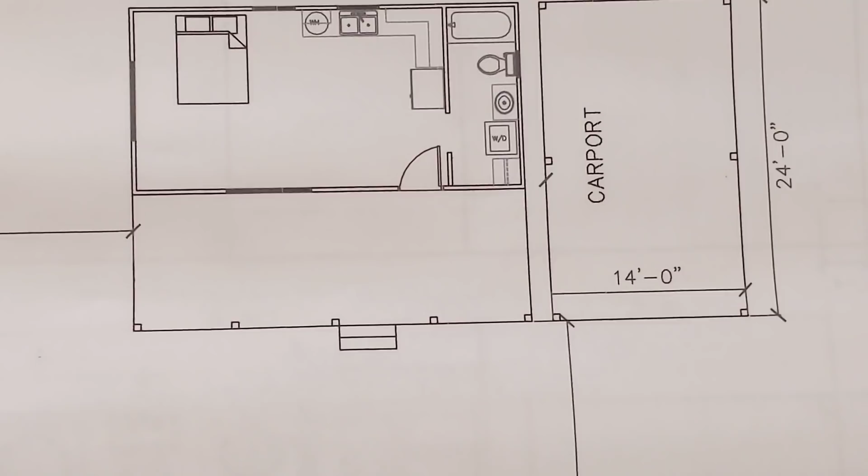This is Rusty 78609, and what you're looking at is a plan for my cabin slash tiny home. For those who haven't seen the cabin, go to my playlist titled Building a Tiny Home, and somewhere in that list you'll see a video showing the cabin I'm planning on building.

The dimensions of this cabin are 14 feet this way, 14 feet, and then an 8 or 10 foot patio there, that's included. So it's 14 by 28 right in here, which is 392 square feet. This is going to be an Eagle carport, just an aluminum carport, and it'll be 14 by 24 or 26 in that range. These right here are windows all around like that. There's a window over the kitchen sink, one in the bathroom there.

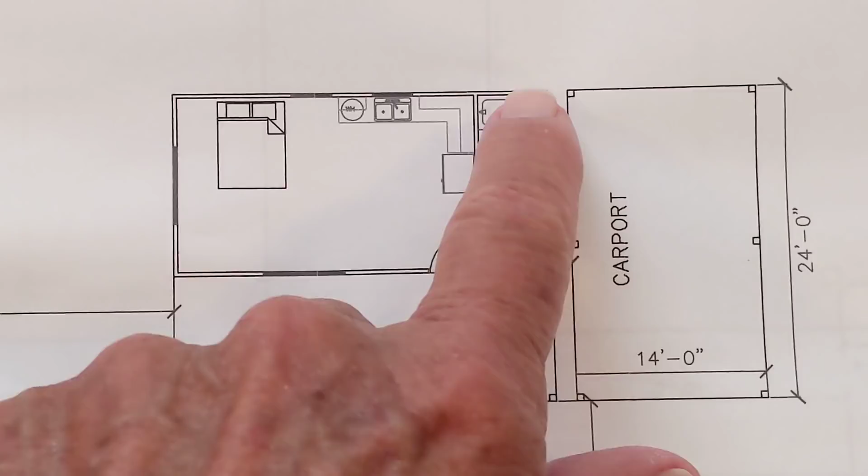And we've made a few changes in the bathroom area. When I talked to Shelton, the owner of Cabin Masters in Fredericksburg, Texas, if you want to check them out, you can check them out at cabinmasters.com.

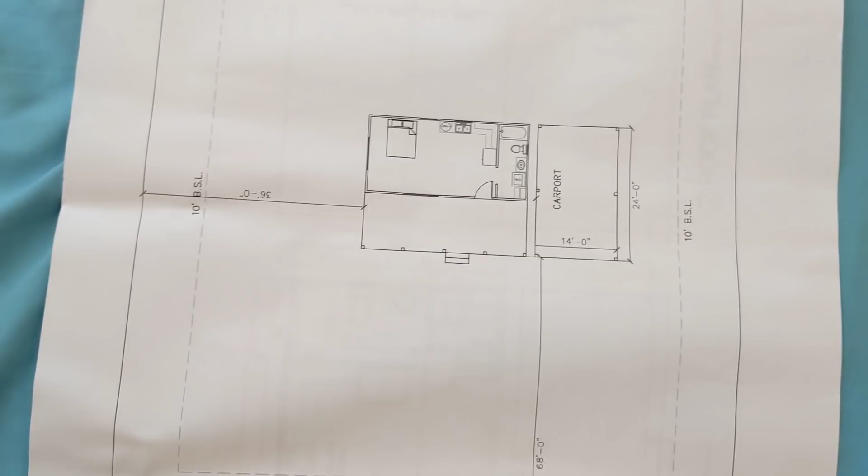But having said that, this is the basic plan, and this is on the lot. This is the street, East Terrence Street, and it shows the dimensions, and the scale is 1 inch equals 10 feet. I'll zoom a little bit and let you take a look at the floor plan a little closer. It's hard to hold the camera steady. The more you zoom, the more it magnifies the shakiness, if you have any.

But you'll see that this is a bed here. That's a hot water heater. That's a 2-bowl sink, actually I'm just going to have 1 there. And then this would be the refrigerator. Come around here, that's open shelving. That's the shower, that's a toilet, sink. I think that's a washer dryer. And then this over here is going to be a little closet.

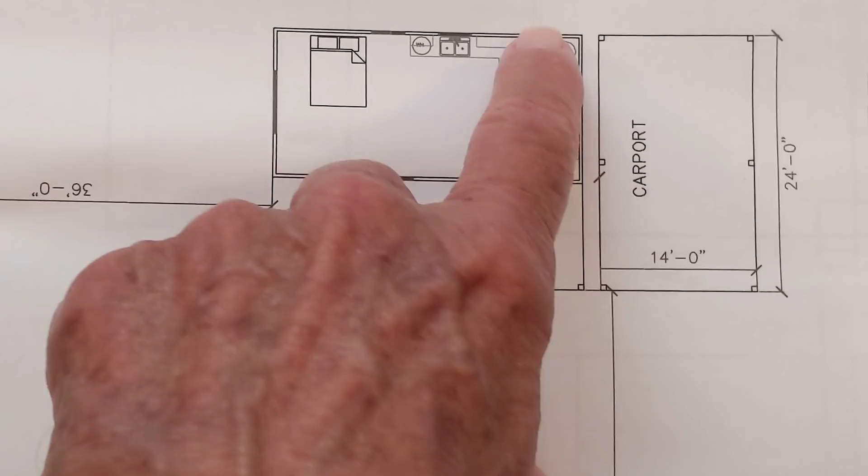But I've changed this up a little bit. We're going to move this wall about a foot this way and give me a little more space in there to do a closet and hanging clothes and all that stuff. Because people are saying, well, there's no storage. There is no storage. I don't want any storage. I don't need any storage.

I live in a 17-foot Casita travel trailer right now, and believe me, everything I've got will fit in there very nicely, okay? No problem, because I've downsized to nothing almost. Again, I'm 75 years old, so things are not really important to me.

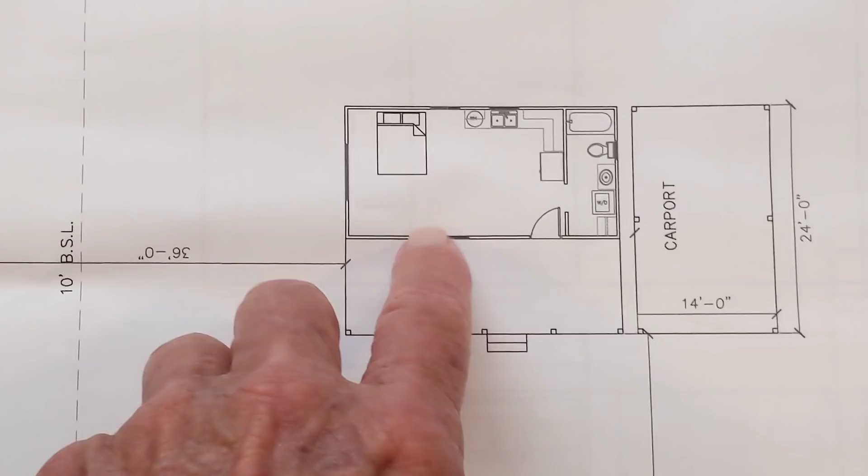But anyway, this is the basic plan here. Again, these right here, these windows are what they call 3050s, there's 2 of them together. So you've got plenty of window there, and then a window over the sink. 3050 means like 3 feet by 5 feet.

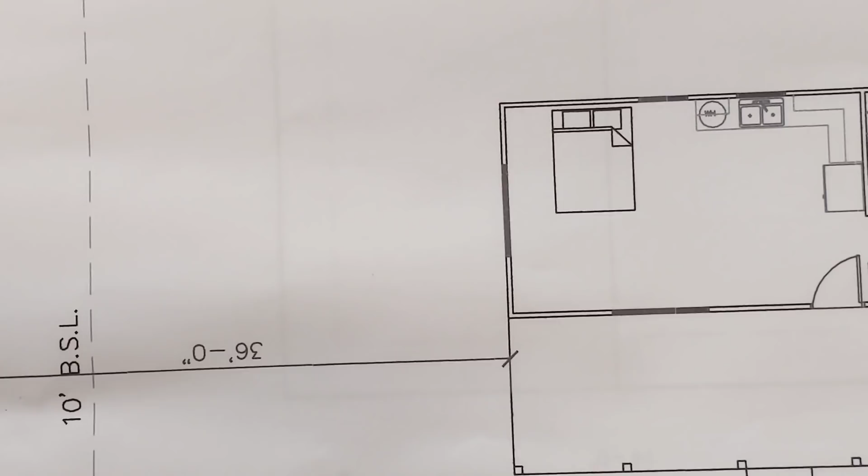Anyway, the guy that drew these plans is named Chad, and his phone number is 830-613-5772, and you can call him if you want to have some plans drawn up.

Or you could actually use the scale here and kind of use this as a guide. Let me get the next one. Now this is a full set of plans that you would give to a builder, even though now Cabin Masters has a plan that you can modify, okay? But I went ahead and did a plan. I took the 14 by 28 foot home and laid it out the way I wanted, to see how what I plan to do is going to fit.

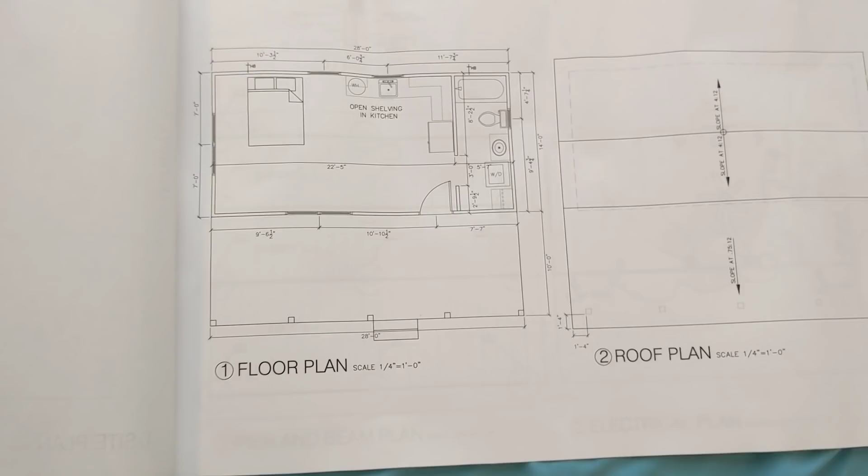It cost me $200 for the plans, which is a hell of a deal, because I've got a full set of plans to give to the city now, since I have to give 2 sets of plans to the city. And then of course I left one with Shelton at Cabin Masters in Fredericksburg with some changes on it.

I'll zoom just a little bit here. And again, let's see what the scale is on it. The scale on this page is 1/4 inch equals 1 foot. And so that shows you exactly how the bed's going to fit in that big open room, and the hot water heater and everything.

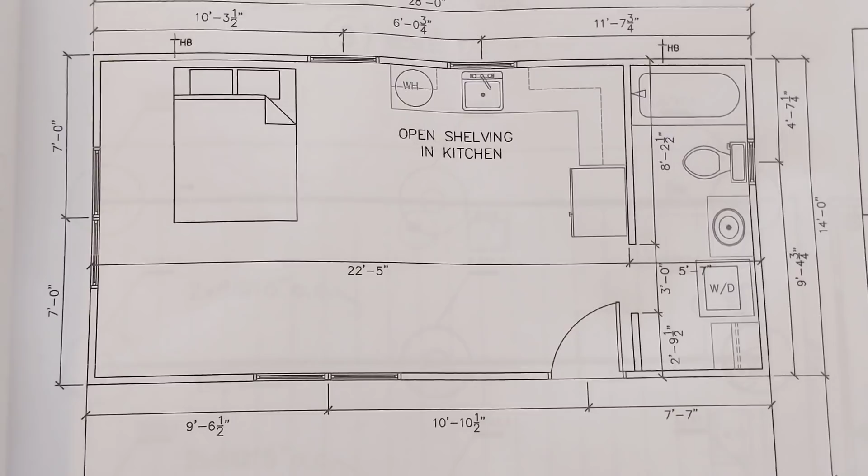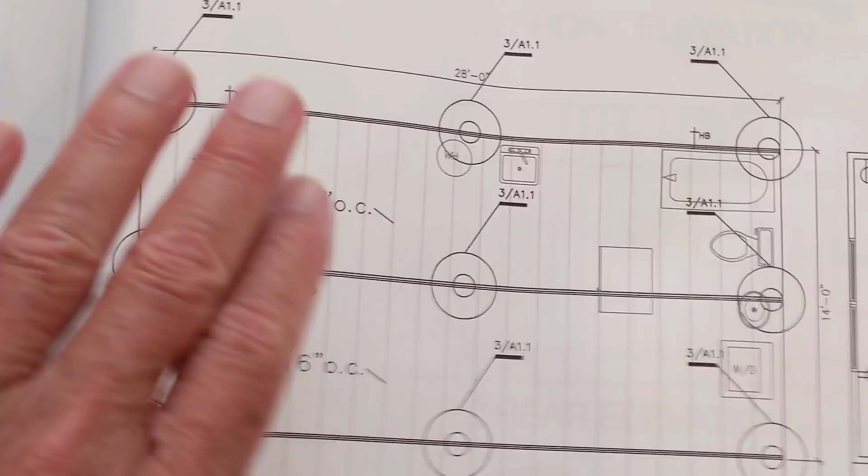And then we go one more page. Let me flip it, I think you end up with 4 pages. Anyway, this is the plan for this. I'm putting it on what's called pier and beam. The foundation type is pier and beam.

You can put them on a slab or whatever you want, but Cabin Masters builds on your lot, on your site. They show it with material and build. You don't even have to clear it if it's fairly level, they'll build right there and you're good to go. But I'm in the city of Llano, so I have to adhere to city ordinances and whatever they are.

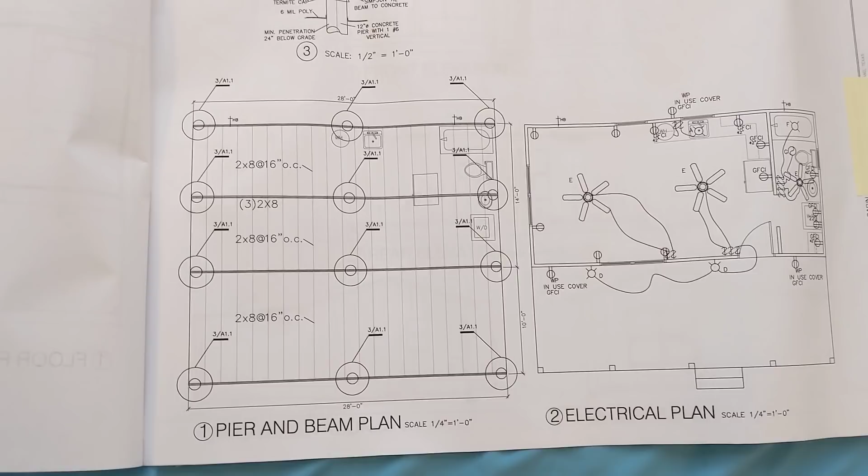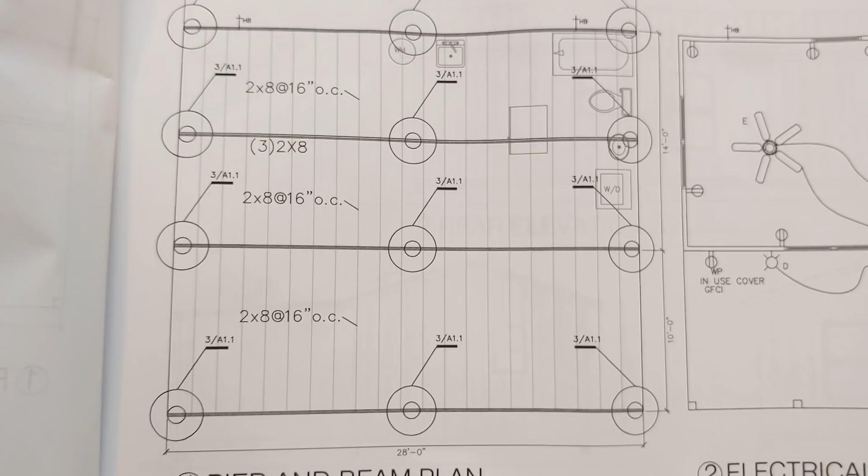But this is a plan for a pier and beam foundation, and this shows the specs for that pier and beam stuff, what's required. It shows the 6 mil poly down here, that's basically some black plastic. And then it shows a termite cap and some different things that are required in the cities. And of course, Cabin Masters will meet all the city requirements, city specs, and that's a pier and beam plan right there.

Next to it is the electrical, and let me move this over a little bit. This is the electrical plan and plumbing on this page, I believe. Yeah, it's got the deal.

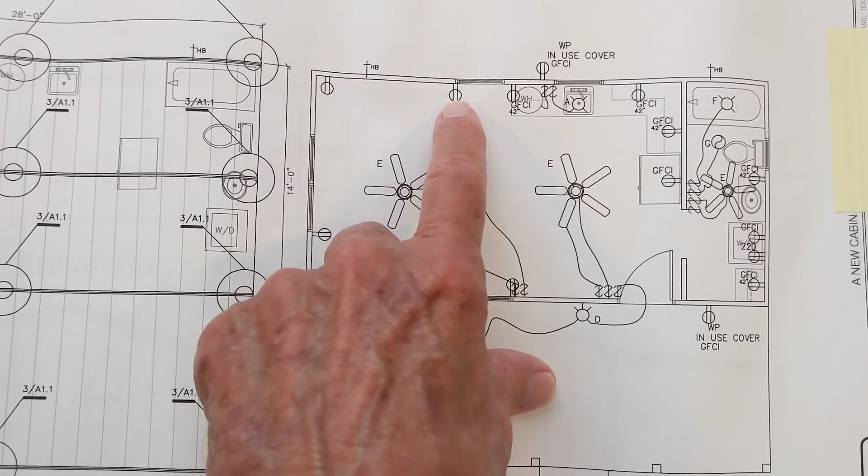Anyway, so you see these little deals like these are outlets, like plug-in outlets, 110 volt, and so you see a bunch of those all along the walls and stuff. These are ceiling fans, shows how they're wired to be turned on and off. These are porch lights or lights out on the patio. And then this right here, these are double outlets on the front porch for, like plugging in, I don't know, a weed eater or whatever, if you wanted to have a little electric barbecue pit or something out there. Anyway, I got a fan in the shower too, and it shows all the electrical outlets.

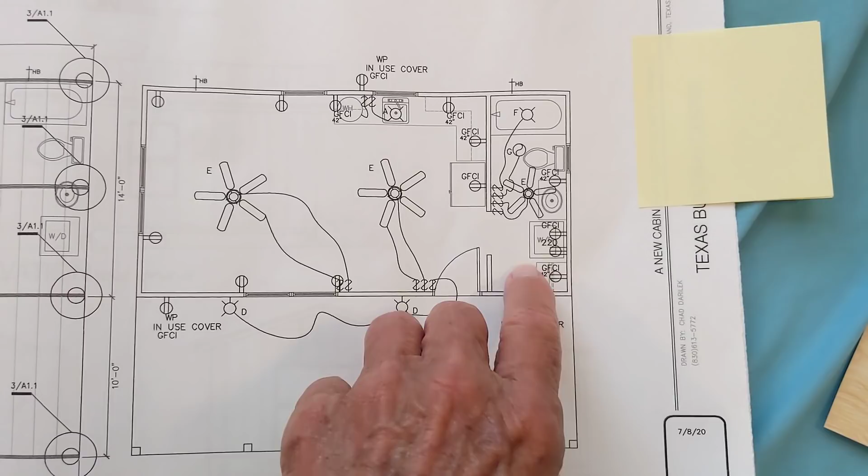And this right over here where it says HB, you may not be able to see that too clearly. HB is hose bib, that's an outside faucet, one on each side, in the rear. I didn't put it in the front because I don't plan on watering grass, nothing, I'm not gonna mow anything. I'm gonna do zero scaping, or I will zero scape it myself. So this is electrical plumbing.

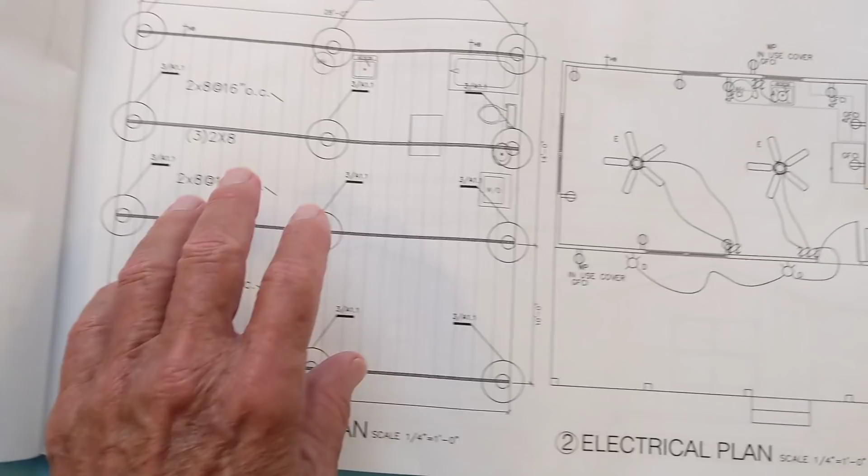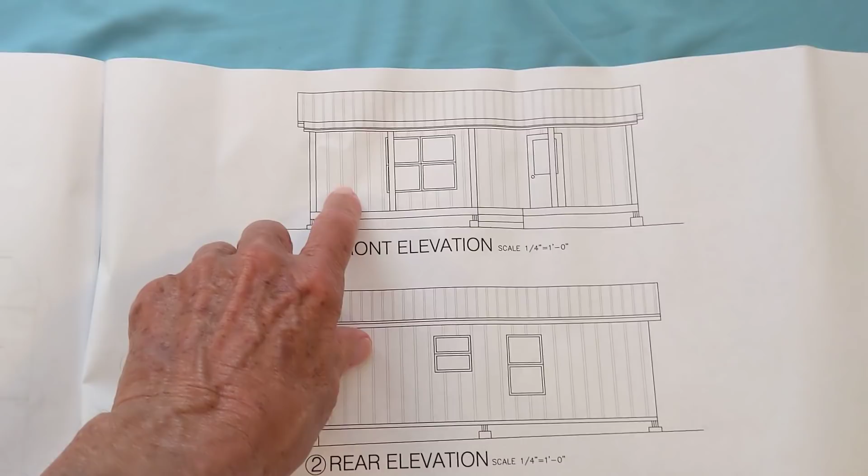This is foundation. And over here, now you're going to see, this is what you call elevations, that's just basically a drawing of the home showing the front view. It's going to have a metal roof, and the siding on this is showing board and batten. But we're actually going to go with cedar lap and gap, the cedar board and batten is running vertically up and down, the lap and gap runs horizontally. Actually, it looks better, okay, so I'm going to do that.

Anyway, this is the front of the house, shows the door, front porch, the steps, and then over here, this is the back of the house, shows the window there. This is the window over the kitchen sink. This is the west side, got one window in the bathroom. Why? Because that's the west side of the house.

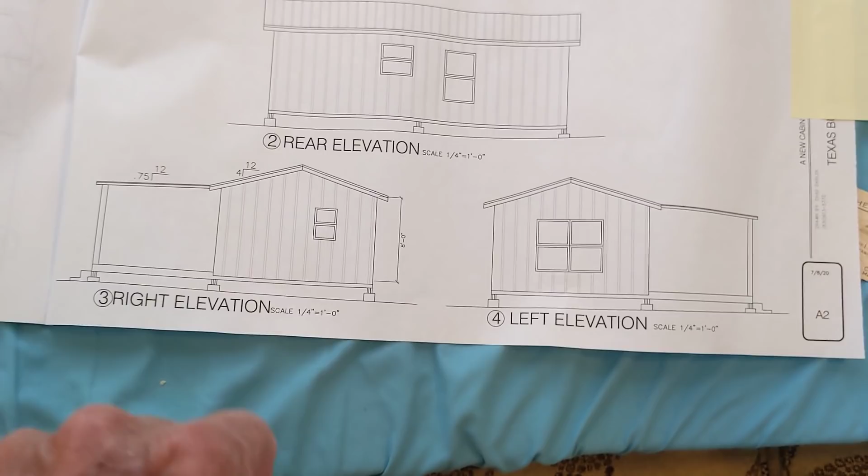Even though I'm going to have a carport out here to help protect it from the direct sun in the summer in Texas, which is very hot, having fewer windows there helps too. And this is the west side here. Actually, this is the east side. Is that right? Can't even remember how my house is done now. Let me think about this. This is the west side over here. I do have windows on the west side. Yeah, because I remember.

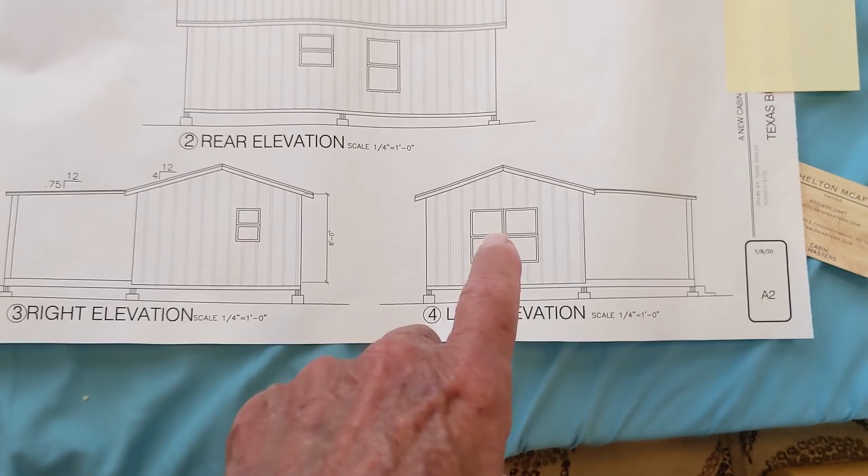Yeah, I added those, and I might take them out. I'm not sure, but we'll see how it goes. I'm going to use a mini split air conditioner. Those are the drawings of the house, the cabin, whatever you want to call it. And that's the last page right there.

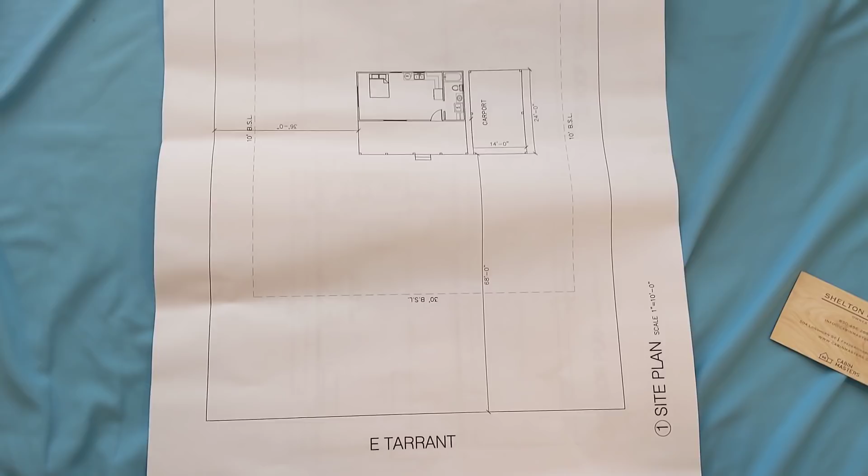So having said that, guys, now you know more about that. But whenever you're going to build a tiny home or a cabin, if you're going to do it yourself, you need a full set of plans. That includes the site plan showing how the house is going to fit on the lot, how far it is from each side, the front and the back. You also need plans showing the electrical layout, where the outlets are going to be. You need a plumbing plan showing where your plumbing is going to be for your washer, dryer, kitchen sink, bathroom sink, and all that. And you also need a plan showing the foundation.

Having said that, guys, that'll get you started. Get you a full set of plans, and then you're good to go. Now, most tiny home builders, cabin builders, have a set of plans, or they actually have a few that they build, just a few different designs.

Now, the downside of buying a tiny home that's pre-built is they have to be able to tow it down the highway. In other words, they have to get it to your site because they build them at their location and take them to your site. So they can't be over, I think, 11 feet wide to go down the highway. This, site-built, this home is 14 feet wide, because it's site built. That makes a big difference. So if you're buying a tiny home that's already made, or you're going to do a site-built home, that's one of the choices you'll need to make if you're going to get into building you a small home.

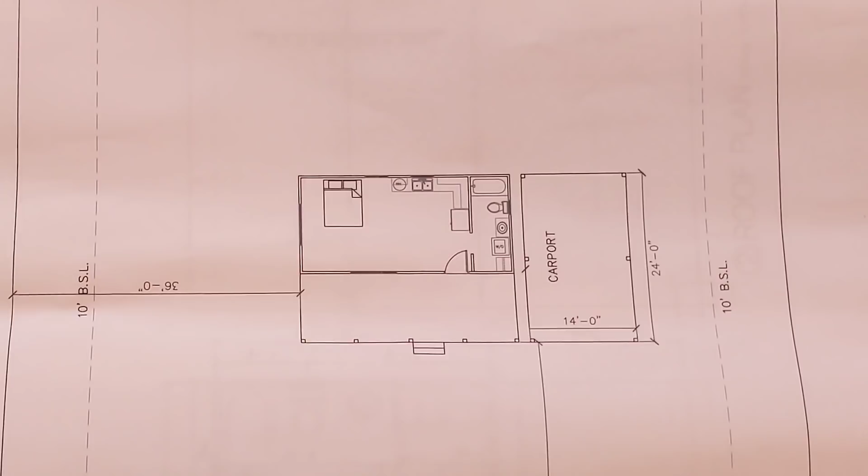But their lead time on building a home right now is about 6 months approximately before they'll get started because they're busy. But the good thing about these people is, most contractors make draws. In other words, you have to pay them each time they've completed, like the foundation, you make a payment. When they complete the framing, you make another payment. They call those draws, okay, you pay the contractor. With these people, Cabin Masters out of Fredericksburg, when they're finished building your home and you're satisfied, you pay them one time, okay. Is that fair?

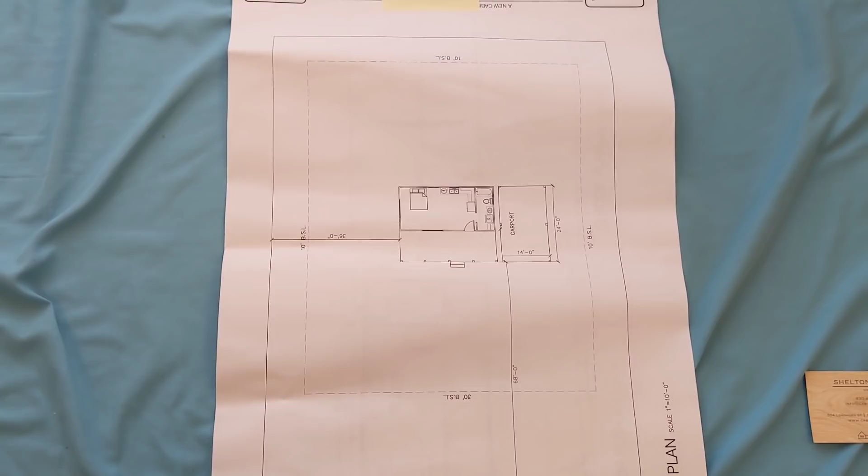Now, hopefully, I need to get water on my lot, and yeah. So here we got, that's a floor plan. I'll leave the thing on here for the floor plan for those of you that might be interested. This is just one big room, one big room, that's all that is. It's got a high ceiling. The walls are like 8 foot, but it goes up to probably 10.5 feet in the center, and it's all done with pine wood, tongue and groove pine, light colored, really nice. You'll see it when you go to their website.